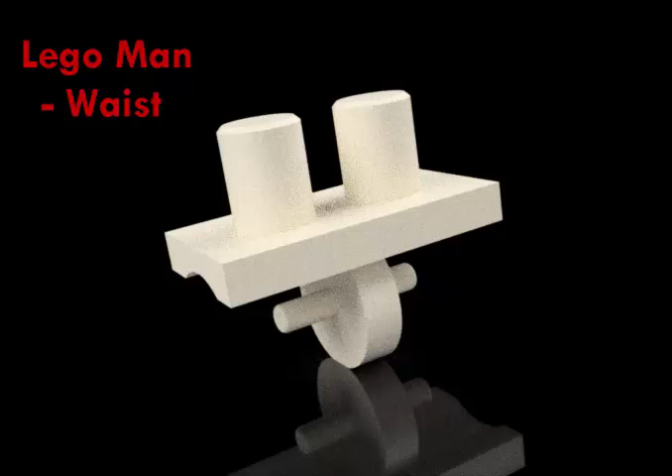To create the waist, we need to start with a new part. Go to New, Metric, and Standard Millimeter IPT.

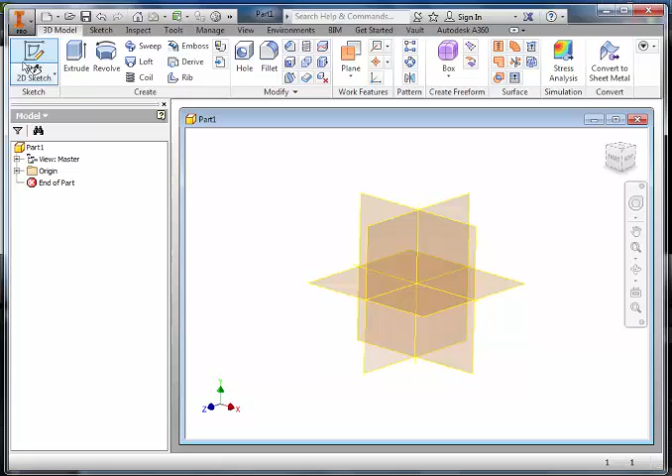We're then going to start with a 2D sketch. Click on 2D sketch and select one of the work planes.

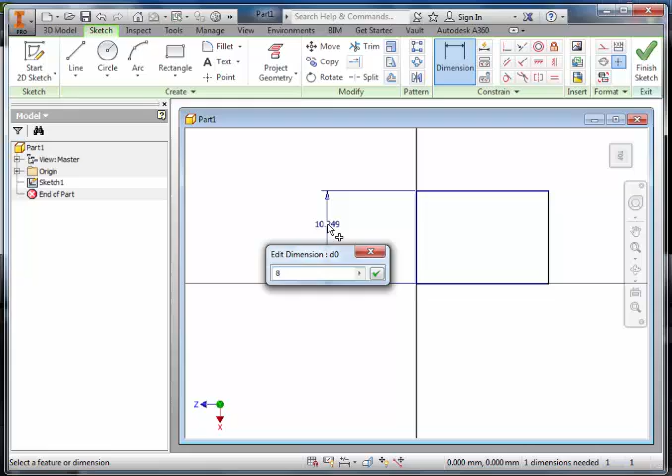Draw a rectangle, click once and click twice. Remember, the shortcut for dimension is D on the keyboard. Make the vertical size 8 and the horizontal 15.

Finish the sketch and extrude that shape 2mm.

We're now going to make the attachments to attach it onto the torso. I'm going to start a new sketch on the top surface.

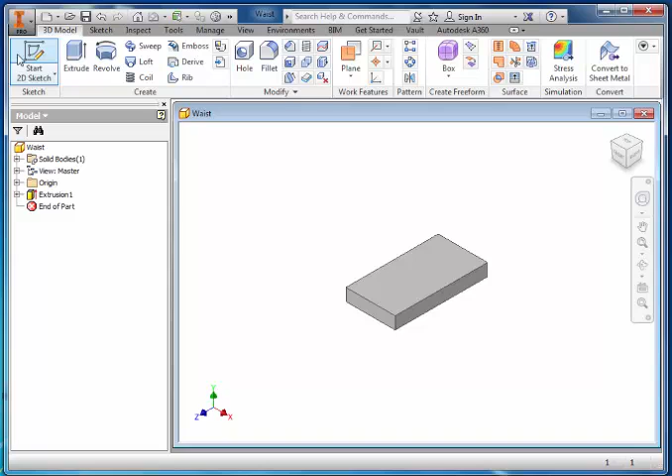Centre the view. Click on circle and find the green dot on the middle of the vertical line and bring it in, and you'll see a dotted line coming up. Click on the middle of the circle and click twice.

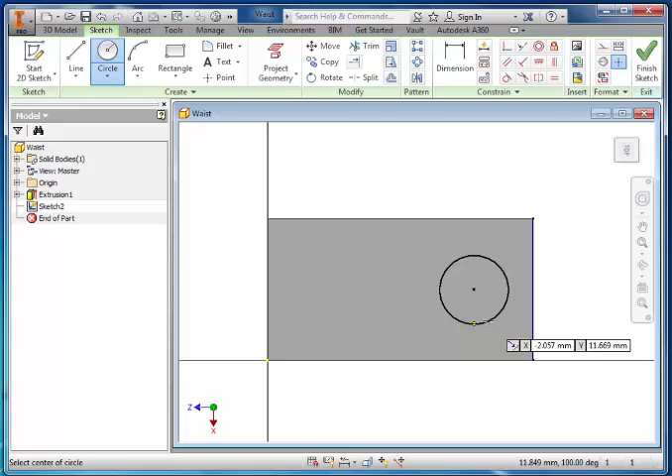Dimension and make it 4mm.

Then we're going to distance it from the edge. The distance we're going to make it is 4.375.

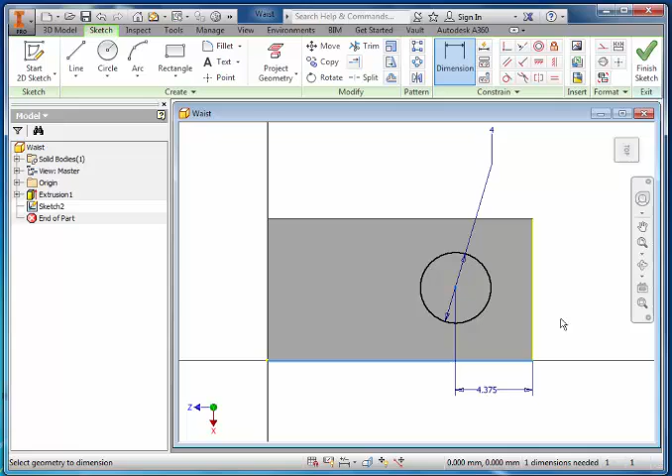Just double check that it's still in the middle. If it's moved, make it 4 from the bottom.

We're then going to draw a line down the centre. To find the centre, I hover over and my yellow dot will snap to the green dot. Click and draw a vertical line straight down the middle.

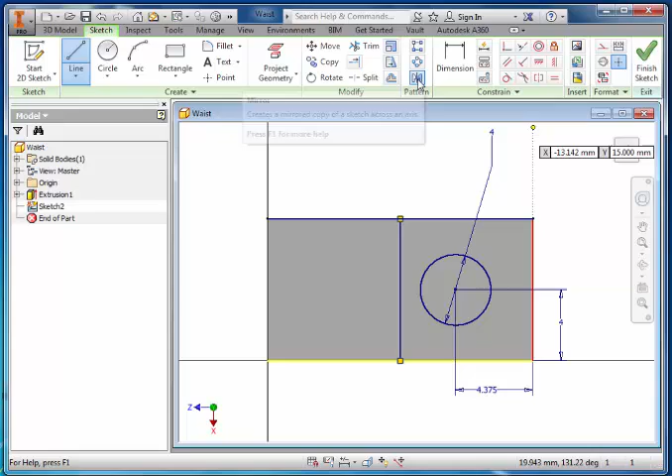Then I'm going to use a mirror tool again. Select the circle and then select the mirror line. Click on apply, and that will give me a circle that is exactly a mirror image of the first one.

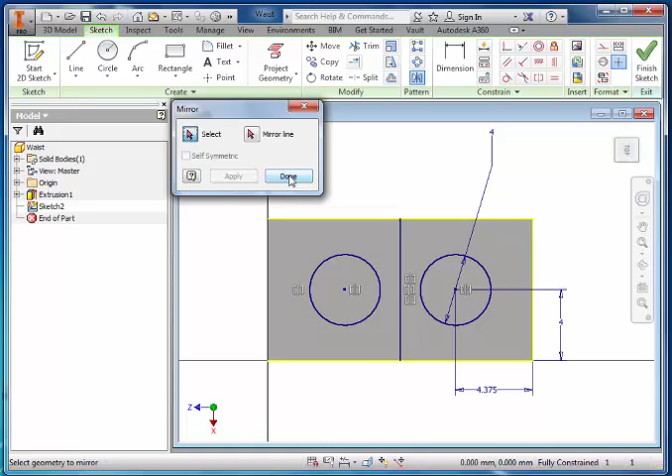Click on done, finish sketch and extrude.

I'm going to select both circles and I'm going to extrude up 5mm.

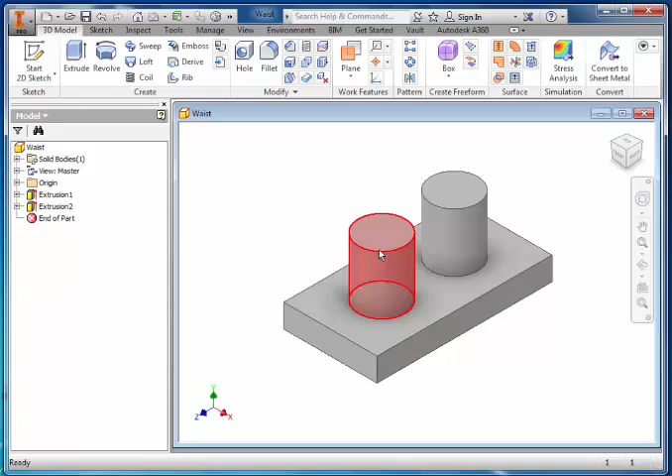To help ease this into the holes, what I'm going to add is a chamfer. Click on chamfer, click on the top of both of the circles and change the chamfer size to 0.25.

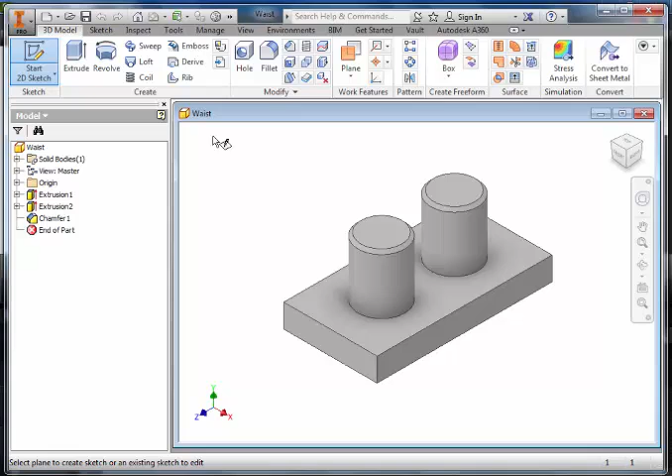We're now going to start the attachment for the legs. We need to add a sort of hip joint onto the bottom of this. Start a sketch on the end of the rectangle.

Draw a circle and have the circle come off the end in the centre. Use your dotted line and draw a circle that just hangs over the edge of the rectangle.

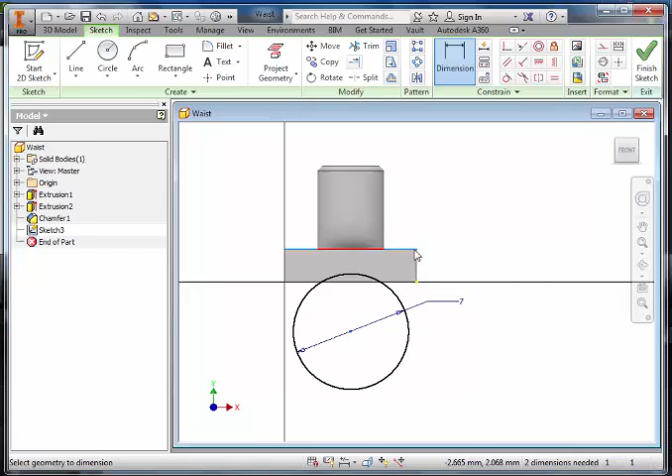Dimension this circle to 7. Then dimension the middle from the top to 4.75.

Finish the sketch, extrude.

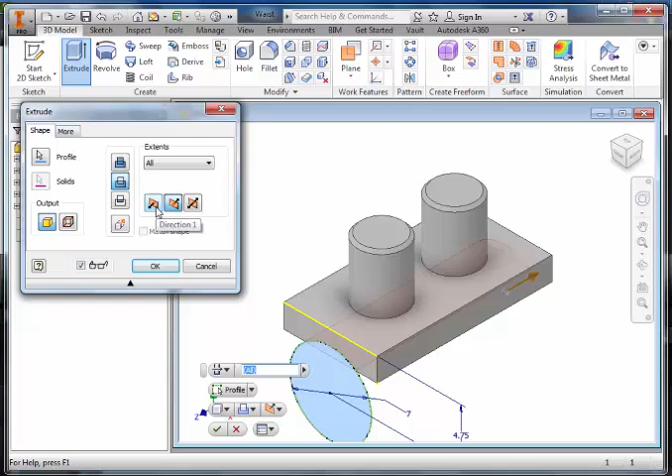Instead of adding on, what we're going to do is we're going to subtract the material. We want to subtract this material the whole distance of this rectangle. To do that, we could put in the size, or we can change this distance to extrude, subtract all, and OK. And we end up with an arch that is subtracted from the bottom of the rectangle.

We're now going to do a more complex edit. To do that, we're going to use a work plane. A work plane is used when we don't have a surface to actually sketch on. This creates an additional surface that we can then add our sketch to.

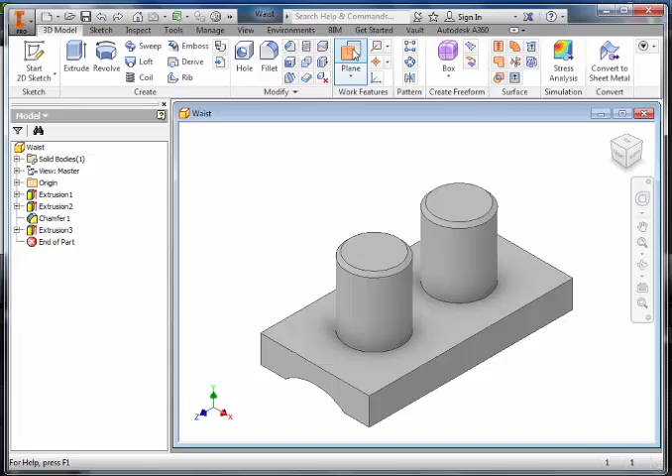We want our work plane to run symmetrically down the middle of this rectangle. To do that, I'm going to click on plane, and I'm going to just click on this end here.

I'm then going to rotate round my object, right click and OK, and I'm going to select the other end as well. As you can see, a workplane comes up directly in the middle of this rectangle.

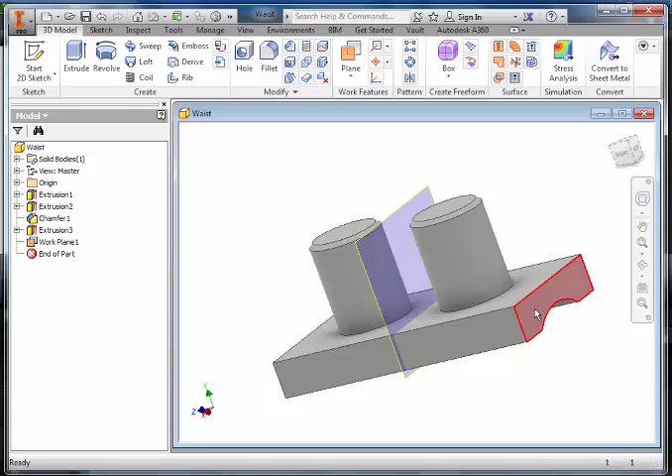I'm then going to sketch on this workplane. Click on sketch and then click on the workplane.

What we want to do is add a cylinder in the middle of this rectangle that we can attach the legs onto.

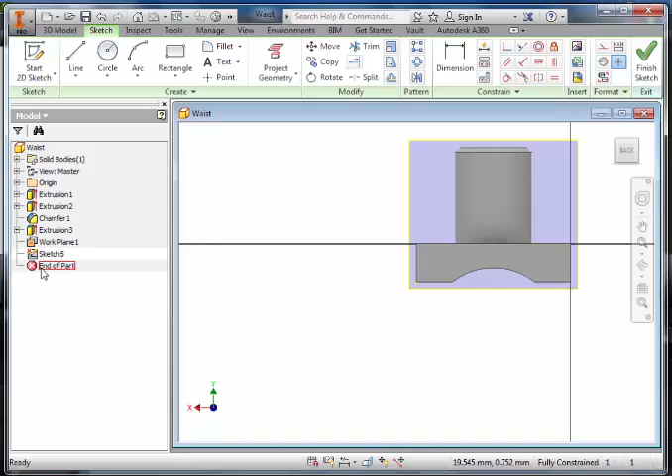To do that, I want to make the old sketch visible. So I'm going to open up my old extrusion where we subtracted the material away, right click on the sketch and make it visible. This brings up that sketch that we did in our last extrusion.

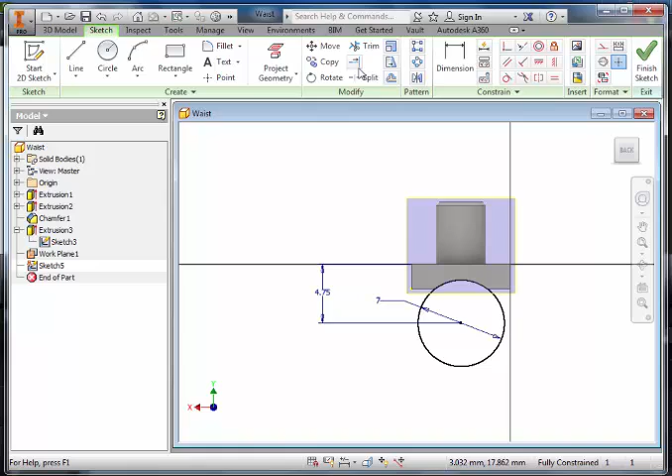What I want to do is project that geometry. So I'm going to click on project geometry and I'm going to click on the circle. When this happens, it changes to a yellow circle.

If I rotate this round, you can see that that circle that we created originally has jumped onto that workplane that we've just created.

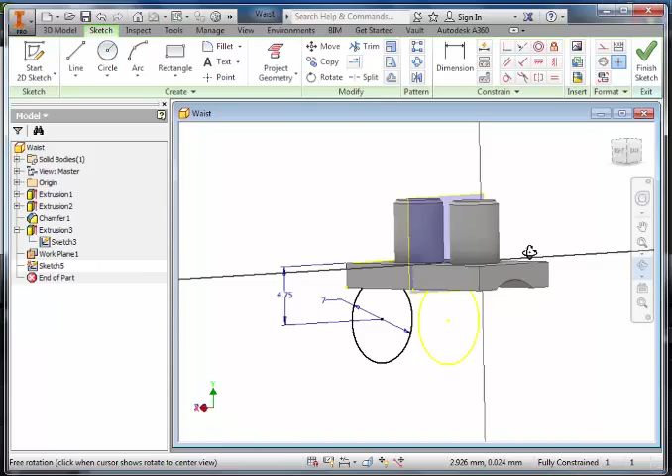I'm going to finish the sketch and I'm going to turn off the visibility of that original sketch. Then I'm going to click on extrude.

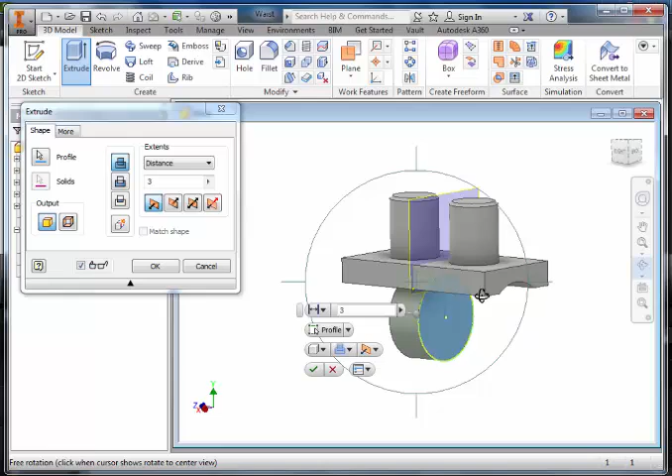As you can see, it tries to extrude it in the one direction. What we want to do is make sure it is a symmetrical extrude. So I'm going to change it so that it goes both ways and change it to 2 millimeters.

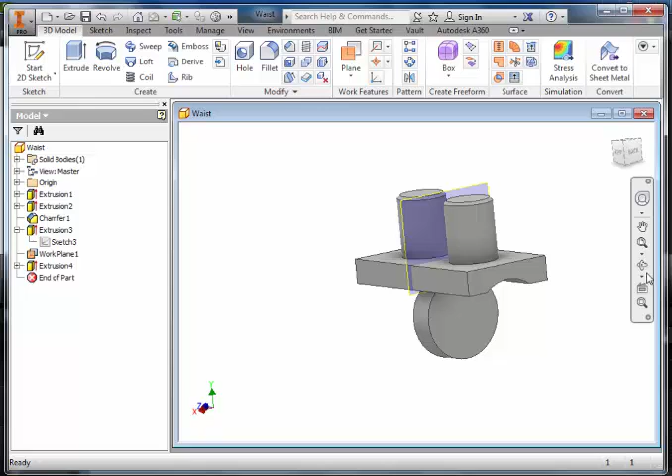That has now added a cylinder that is exactly in the middle of the waist.

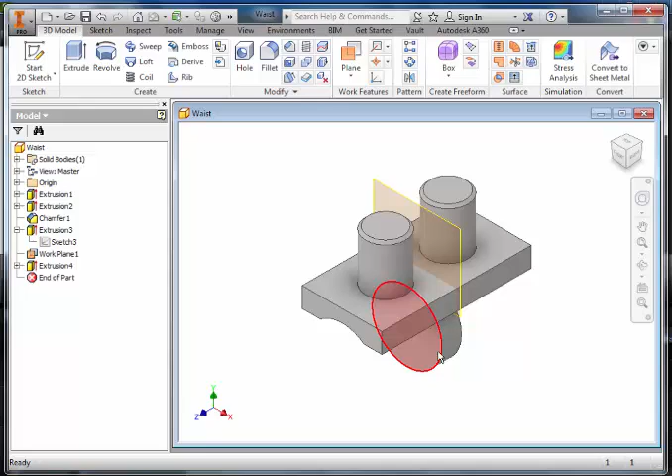We're now going to add the rails that the legs will attach onto. These will attach onto the cylinder that we just created. So start a sketch on the side profile of that cylinder.

We have to find the centre of this circle. So we're going to project the geometry again of the circle, and you can see it projects up the centre.

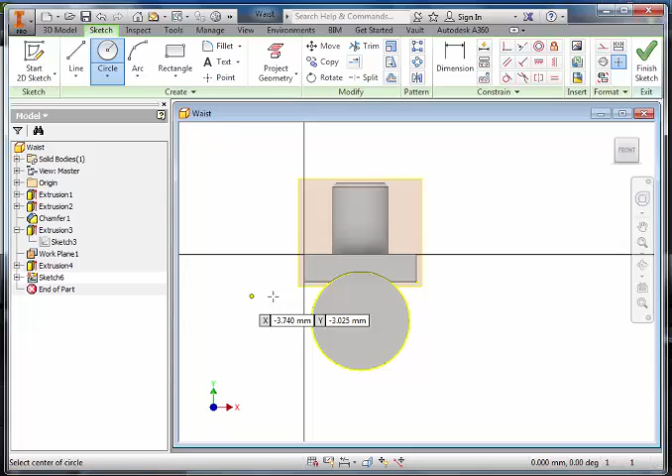Draw another circle and dimension it to 1.5 millimeters.

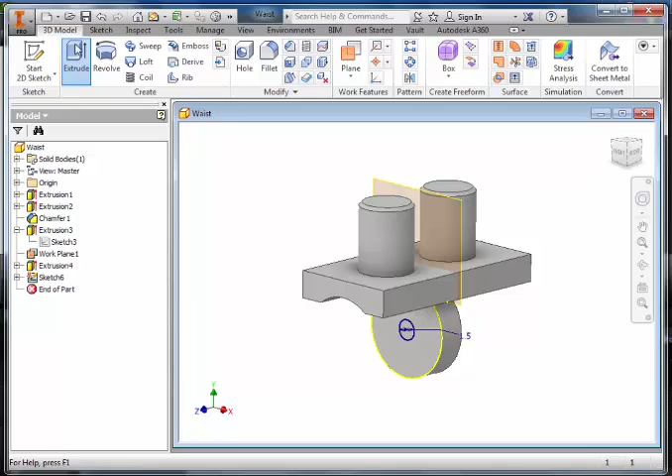Finish the sketch. If you can't see it, just rotate round until you can. Extrude this small circle out 3 millimeters.

Again, to ease it into the hole, we're going to add a fillet this time. Rather than a chamfer which creates a sharp edge, a fillet rounds the edge.

I'm going to click on fillet and I'm going to click on the edge of this cylinder. And I'm going to make sure the fillet size is 0.25. And OK.

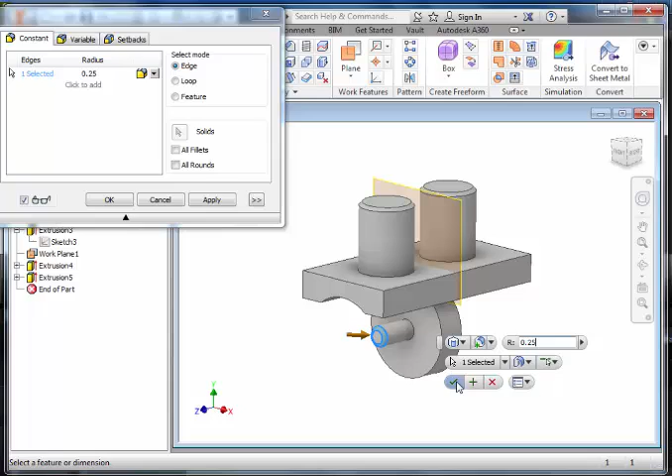That gives us one side of the leg attachment. We want to have exactly the same thing mirrored on this side.

I'm going to click on mirror, and I want to make sure I'm selecting both the extrusion and the fillet. That is the feature that we want to mirror.

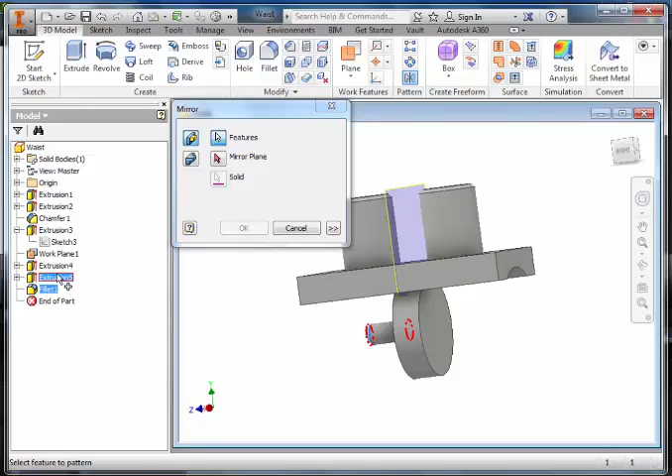The mirror plane is that plane that we used in the last extrusion. So I'm going to select the mirror plane and it will change from a red arrow to a white arrow.

And you can see it puts in that extrusion where it would go. Click OK.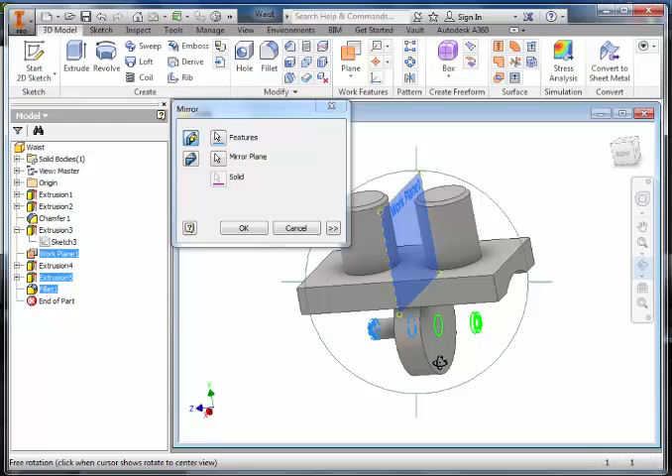And we have mirrored that extrusion and that fillet so that it's exactly symmetrical on the other side.

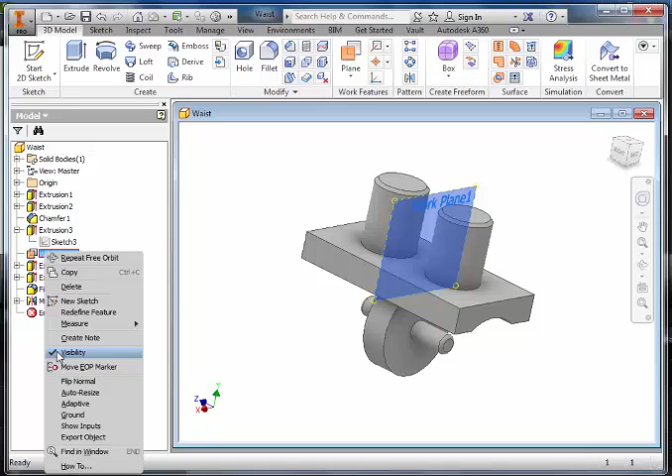You can now turn off the visibility of that workplane by right clicking on it and unselecting visibility. You're now ready to change the material and add it to your assembly.